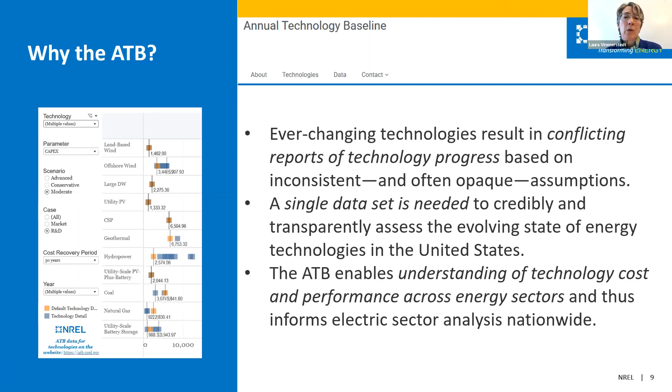So how these technologies fit into the entire system are questions that are delved into in other models, such as our capacity expansion model, the ReEDS model, such as the resource planning model. So those types of models take into account a lot of other factors that influence how effective the technologies actually are within the electricity system.

And on the other end, distinct from planning the whole entire electricity system like in ReEDS and RPM, the System Advisor Model or the REopt model are models that are more site specific and system specific. And while ATB coordinates with those, and those models may use some of the data in ATB, if you are specifically planning a particular installation, other factors that are considered in those kinds of models may be useful to you as well.

So while we think ATB has many applications, it does not do everything. We'd be happy to entertain questions about ATB relative to related tools at any time. And the resource breakout group will also highlight how ATB relates to the resource perspective.

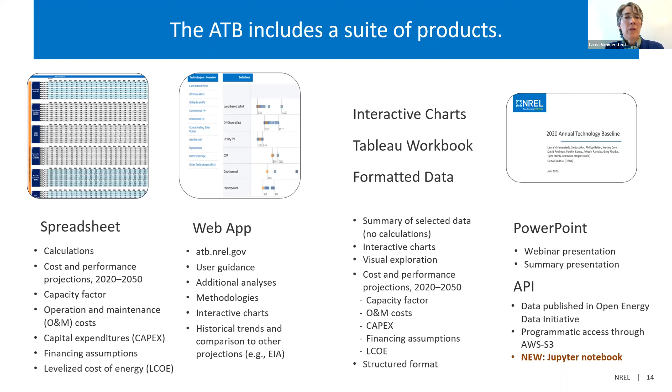I will say that one common challenge across this data set is that folks like to use a levelized cost of energy to compare technologies. And the levelized cost of energy is an interesting high-level metric for that purpose, but may easily be applied to purposes that really require consideration of more factors. So the ATB takes these metrics of capital cost, operations and maintenance cost, and capacity factors, and calculates an LCOE for what it's worth. So please carefully consider the application of LCOE, what it is, what it isn't, what it doesn't take into account, before you apply it broadly.

Many people use just portions of the ATB. So, maybe they are interested in the CapEx projections, but find the O&M or the capacity factor projections or categories don't apply to their situation. And that's totally fine. But if you're doing an analysis, I recommend being very thoughtful about what you use.

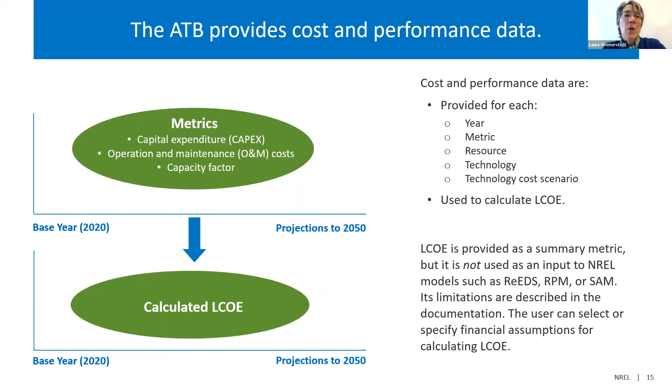So in terms of ATB technology coverage, we have the usual technologies from before, and we also have several new ones. Very excited to offer new distributed wind technology this year, as well as CapEx for pumped storage hydropower. And then we're also pulling in from EIA the small modular reactor on the nuclear side. So the other technologies on this chart are technologies where the national labs in this project are not developing a separate projection of technology innovation. We are relying on the EIA's Annual Energy Outlook for those other technologies.

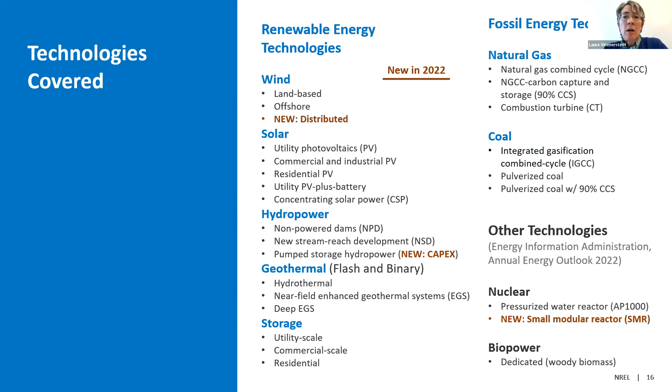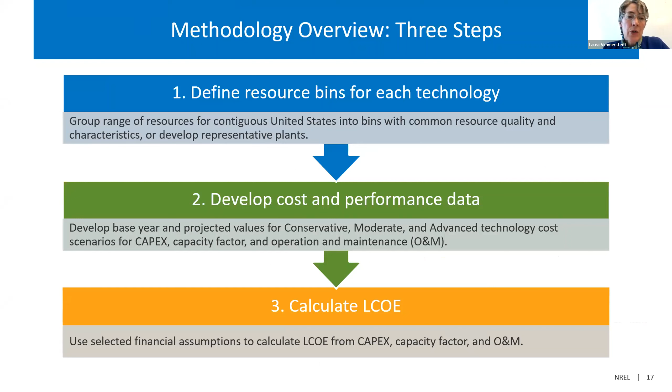So the ATB essentially applies the methodology shown here. So first, we take each technology and categorize it into bins. So we have a representative technology and a variety of performance of that technology. We then develop cost and performance data for each of those bins. And finally, we use that to calculate LCOE. So the technology bins are shown here. And as you can see, the bins are made often based on resource quality, but not entirely based on resource quality. Some of the binning also has a technological dimension.

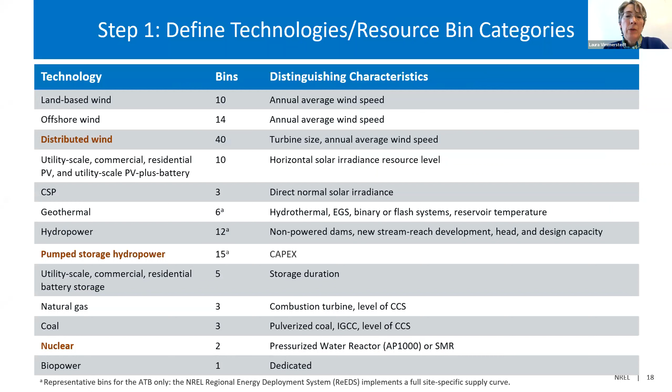So if you have site-specific resource quality questions, the ATB is not the place to start. You want to be looking into the specific resource data and then probably also one of our more site-specific models. However, for the broad overview of resource quality across the whole US at this kind of high level, the ATB does a great job of summarizing what the different performance is.

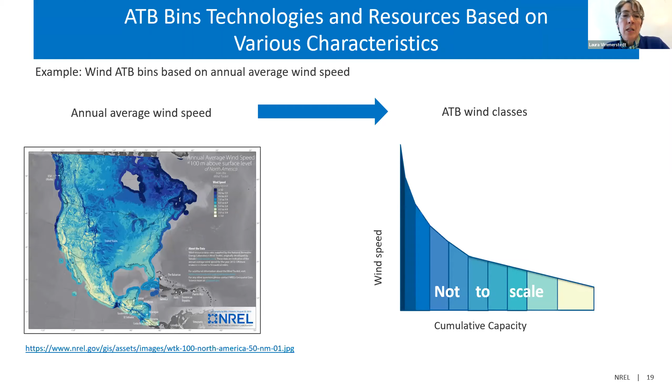So ATB has these three scenarios for technology innovation. And this technology innovation in the long term is really the primary focus of what ATB is doing. So we're looking across the research and development space across national labs and the Department of Energy, and trying to assess what technology innovations might change the cost and performance of these technologies in the long term.

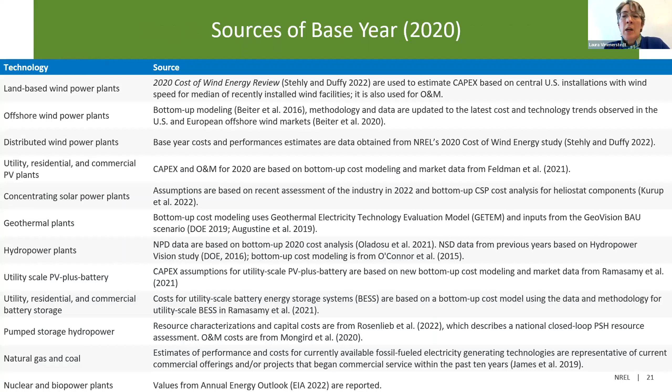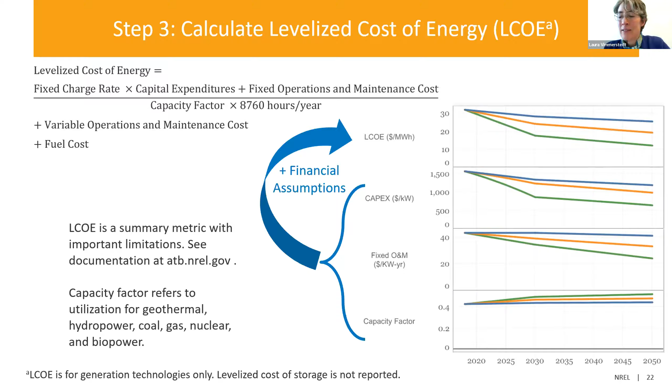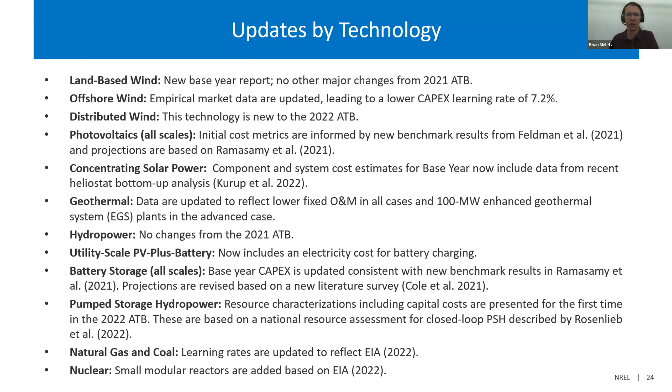Yeah, great. Let's go to the next slide. So this summarizes the technology-specific updates for the 2022 Annual Technology Baseline. Typically, the technology analysts are publishing all of their cost analysis reports, some on an annual basis, some less frequently. But when those new cost reports are coming out, we're including these in the data. I'm not going to read through this whole slide, but if you want to dive into the details on any of these, that's available in the approach and methodology section and changes in 2022 sections of the about pages of the website. Next slide.

During the webinar today, we're going to highlight 5 technologies with what we view are significant changes. So distributed wind is new to the 2022 ATB, so we'll be hearing about that first. Geothermal had some updates that reduced the fixed O&M, and then some new reports for utility scale PV plus battery, battery storage, and pumped storage hydropower. Next slide. So at this point, I'll hand things off to Parangat for distributed wind.

Thanks, Brian. Hey everyone, good to be presenting here. As Brian mentioned, distributed wind is being added for the first time to the ATB, and a major study that was just released this year made that possible, the Distributed Wind Futures study. Through the study, we looked at what are the current cost and performance characteristics of distributed wind, and what will they look like 10, 15, and up until 2050 in the future. Is there a next slide, Brian?

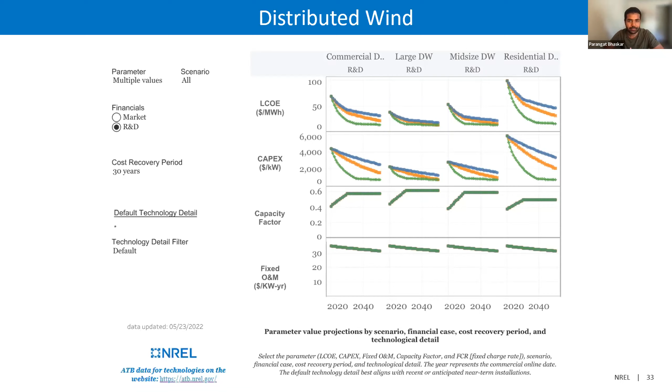So as you can see here, these were the cost projections that were developed for the Distributed Wind Futures study. Essentially, we took the cost and performance projections that were developed back in 2015 in the DOE's Wind Vision study coupled with the 2016 NREL study, the behind-the-meter distributed wind study. So we took the learning curves that were developed under those studies and updated the cost and performance to 2020 numbers, and then reapplied those learning curves to get these new cost and performance projections up until the year 2050. Next slide, please. That's basically the gist of it, but happy to answer any questions from folks.

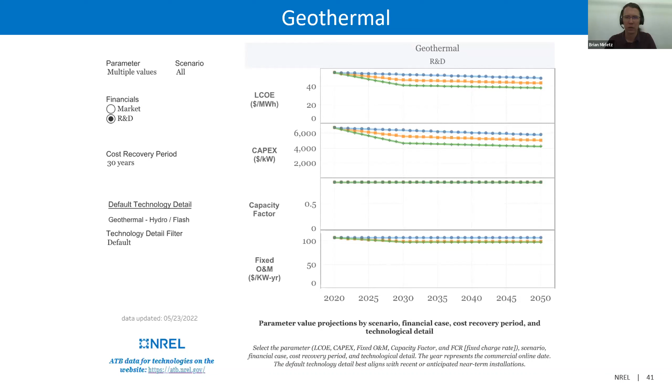And then this shows the year-over-year changes. So again, we had that decrease in fixed O&M based on empirical data, which produced a resulting decrease in LCOE for geothermal.

So Brian, how do I tell what dollar year these numbers are in? Right, so all of the dollar years presented in the 2022 ATB are 2020 real dollars. So if you're looking for a nominal number for say 2030, we would recommend you apply an inflation forecast that you get from somewhere else in order to do that. Our default inflation is 2.5%. So we can discuss maybe at one of the breakout sessions or during the financial session how that's applied in the spreadsheets.

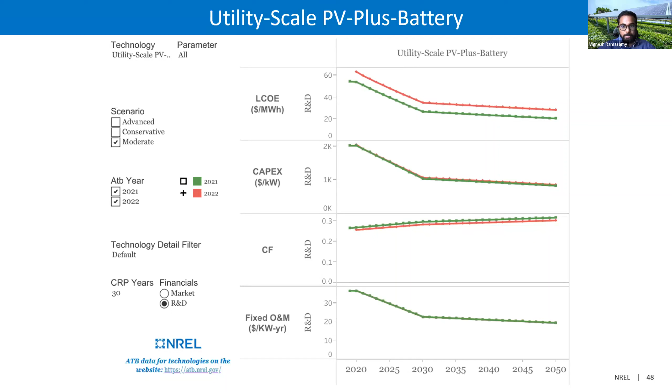Let's go ahead and go to the next slide. And I'll hand things off to Nate Blair. Thank you, Brian. Happy to be here today and excited to talk about utility scale battery storage. And it's great that we just had Vignesh talking, because Vignesh was critical to the update for this year on utility scale battery storage, in addition to helping last year.

So I think key things is, just like last year, we are continuing to share both utility scale, commercial scale, and residential scale battery systems. And the methodology is similar to what was done last year. Last year was a big change from the year before, and it stems from our work in the NREL Storage Futures Study primarily, but in combination with the ongoing work supported by the Solar Office on solar plus storage system cost analysis that Vignesh was referring to.

Next slide. As you can see here, we maintain a consistent capacity factor for these storage systems, and we anticipate, as we did last year, ongoing CapEx reduction and fixed O&M reduction across all of these. The primary difference from last year to this year at the utility scale was, as with the commercial and residential scale, updated 2020 cost numbers and reapplication of the future projections and literature search that we have updated for this year as well.

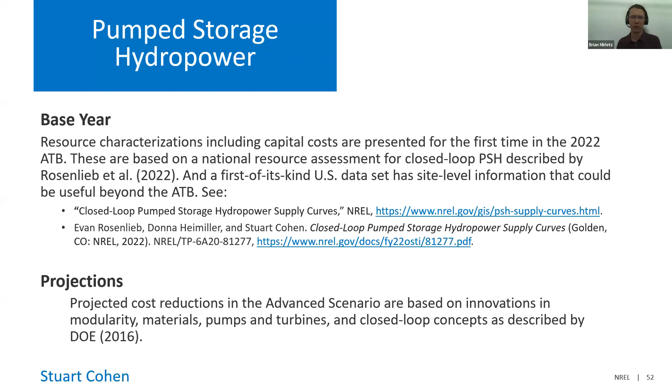So for the ATB, we've sorted this down to 15 representative classes. But if you dig into the reports that are linked here, you can find that full supply curve. And then projections for this technology included in the advanced scenario are based on the 2016 Hydropower Vision study. Next slide. So this shows the defaults for pumped storage hydropower. And you can see that new CapEx data for the representative class in that top bin.

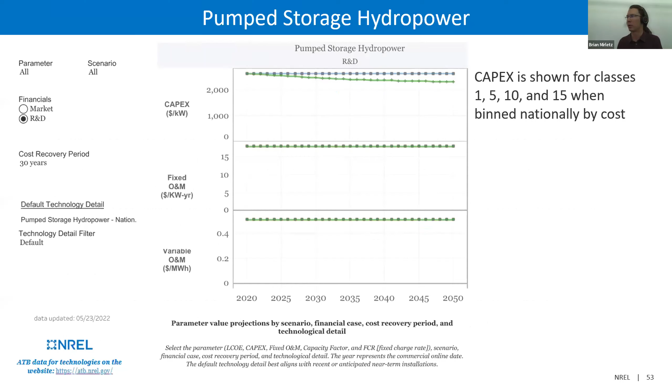And if there are any questions on pumped storage hydropower, we can either answer them in the chat or at the breakout session. Let's go ahead and go on to the next slide. And at this point, I'll hand things off to David Feldman. Thanks so much. Let me know if you can't hear me. If we could go to the next slide.

So we're going to cover a little bit of our financial assumptions, and I may probably reiterate a lot of the good things that Laura and Brian were talking about. So just as a point of clarification, as mentioned, our base year is 2020, the dollar year is 2020. And historical data include data reported in 2020. So the general approaches for our financial assumptions are similar to what was done last year. There are 2 financial cases. There's an R&D and a market and policies case.

The difference being the market and policy cases include 2 distinct things. One, they include the tax credits for the renewable technologies. And they also include an assumption that interest rates are going to go up over time. So those are the primary differences. They both assume, based off of research, common, typical financing arrangements in the U.S. So I think they're all based off of an IPP approach. And that's how we modeled typical financial cases for each. We could go to the next slide.

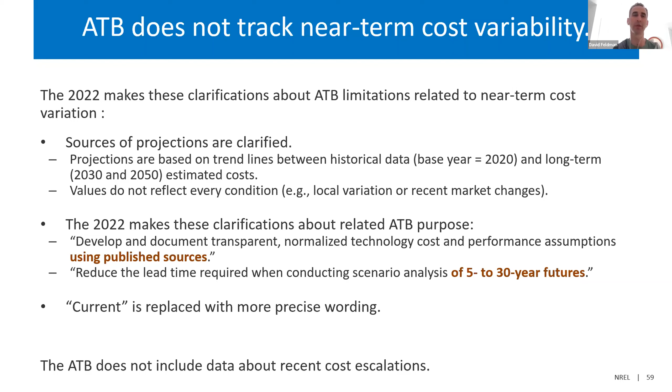So if we can go to the next slide. I'm just going to cover this briefly, and we can get into more of it in the finance breakout section, but there are some reasons why the finances change between technologies and where they come from.